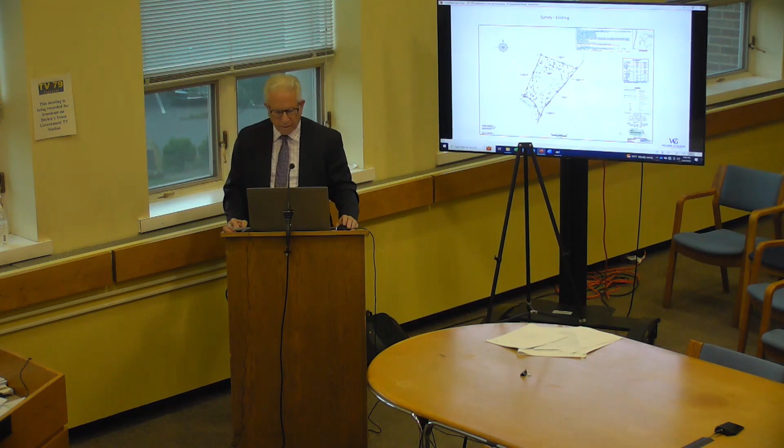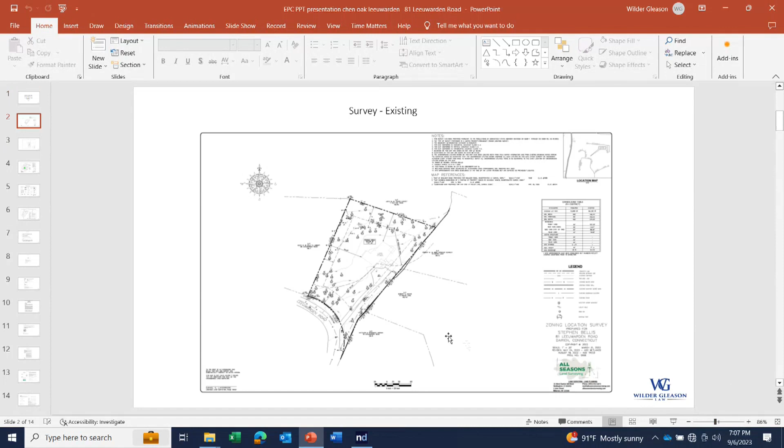For some reason I'm not able to do that at this point, given the present setup. Let me go back and see if I can do this a different way. Okay, this one I can blow up.

So this is the survey that you have, and it shows, where my pointer is, the old one-story dwelling, a 2,200 square foot building. We're on 1.27 acres, a little over 1.25 acres, and the wetlands are all in the north along here where my cursor is. That will show up on the architect's survey, or the site plan that we'll provide you shortly. The existing house was well within the 50-foot wetland upland regulated area, and it didn't have any backyard. It's located 157 feet from the street.

Now that has been removed, and if you've been out there, you can see the site is vacant in anticipation of hopefully a speedy approval from you all so we can move forward. There are no structures to treat stormwater. There's no buffer on the wetlands. Untreated, unrenovated water runs directly into the wetlands.

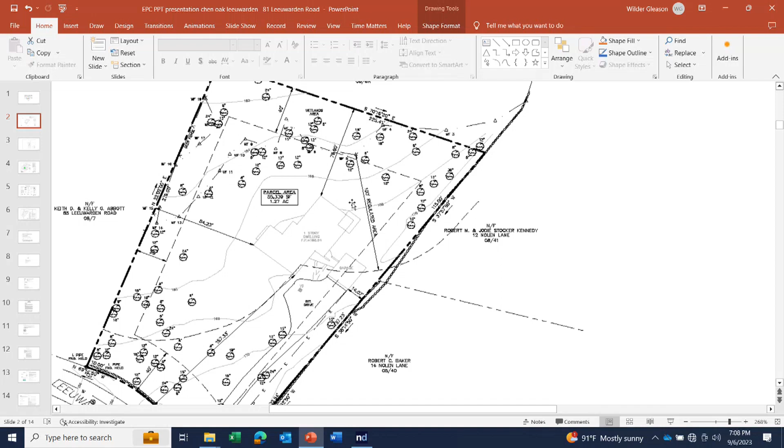Let me add also that there's no underground recharge of water, and no marking of the wetlands and sensitive areas. All of this will be addressed in the plans that we submit tonight. So we're making significant improvements over the existing conditions.

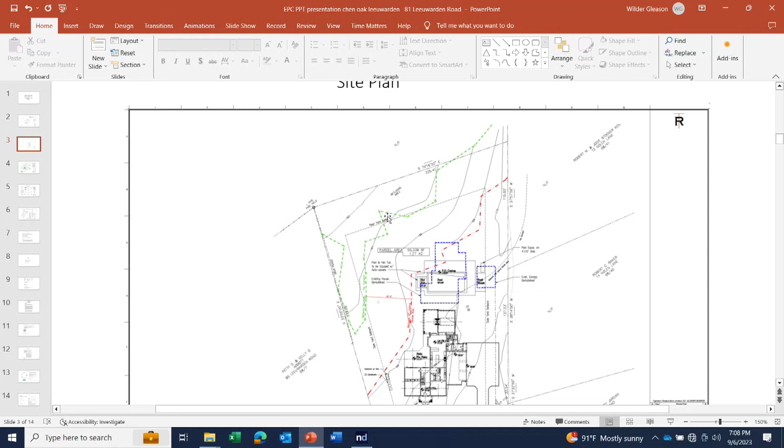Let me go to the next slide. This is the architectural site plan that was submitted this afternoon, the third page in your outline. The green line is the wetlands, and you'll see they're confined essentially to the northwest corner of the property. The red line is the 50-foot regulated area, and you can see the old house encroached substantially into it.

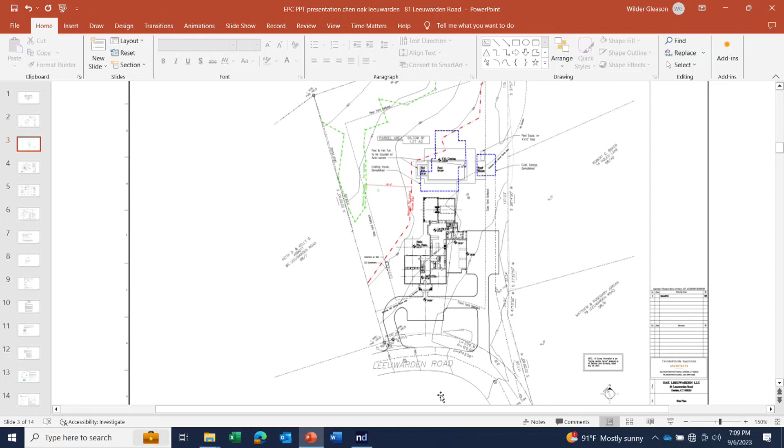Our new house doesn't touch the upland review area at all. Only a small portion of the pool apron or patio goes into the upland review area. The house has been moved so it's 55 feet from the street, 100 feet forward of the old house. The old house is shown in blue, and you can see its location proximate to the wetlands, and how much further away we are now.

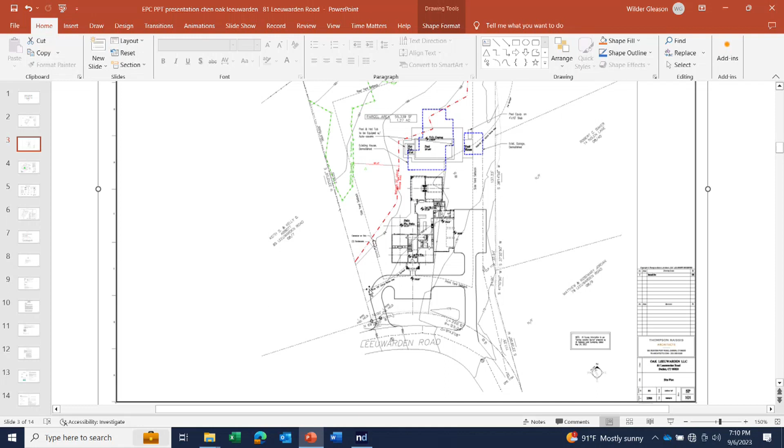That allows stormwater runoff from the roof to be renovated over a greater distance before it gets into the wetlands. That reduces temperatures and particulate matter, and as you'll see in the next site plan—this is our engineer's plan, which has been submitted.

The green area of the roof you see here is going to be directed into the Cultec. They've got 28 Cultec located substantially, virtually all of them, in the upland review area. Those allow us to meet the town's regulations for stormwater drainage. We'll have a zero increase in runoff in a 2-year, 5-year, 10-year, 25-year, and 50-year storm event—we're actually reducing stormwater runoff because it can recharge in these Cultec.

There are also 2 additional Cultec proposed near the pool, for sump pumps if needed for the basement. The water from the sump pump would go into these Cultec and then overflow into a level spreader.

Matt Popp, our environmentalist, looked at the level spreader and said it should be moved and placed so it's on the contour, consistent with the contour. Right now it's on a slight downhill, and water would tend to go down to the bottom end of it. We want it perpendicular to the fall line, so the water will migrate and sheet flow into the wetlands.

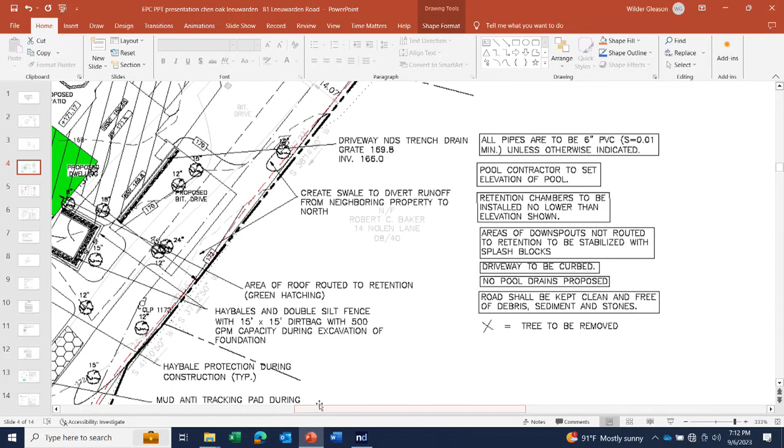There was a question about our first floor elevation. For the record, the house is served by town water and town sewer, and those lines are marked in the front—this is the water line right here. I'll blow it up so you can see. There's the water line leading to the house, and this is the line to the sewer. So we're not affecting any trees, and the lines are designed to serve the property without impacting water or sewer.

The first floor of the house is at elevation 171.5. Rick had conveyed that you wanted that information, and you also wanted the basement elevation, which is 159.45. So we're about 12 feet below the first floor, which is a couple of feet above the grade.

The existing grade is 170 on the east or southeast side of the property, and 174 on the northwest side of the house. So there's about a 4-foot drop as you go from one side of the house to the other.

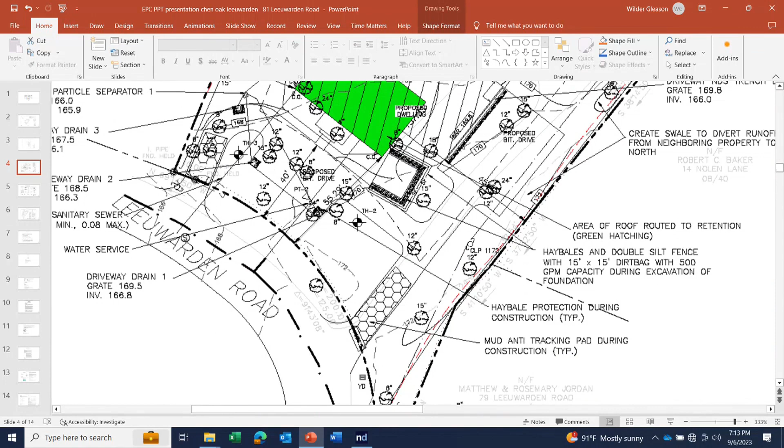Our grades are such that we're at elevation 172 in this corner of the property in the front, and it drops gradually to 162 in the rear—about a 10-foot drop over 300 feet. So it's gently sloping, not precipitous in any way, and those who walk it can see that it basically sheds water, flowing towards the northwest where the wetlands are located. And that's as it should be.

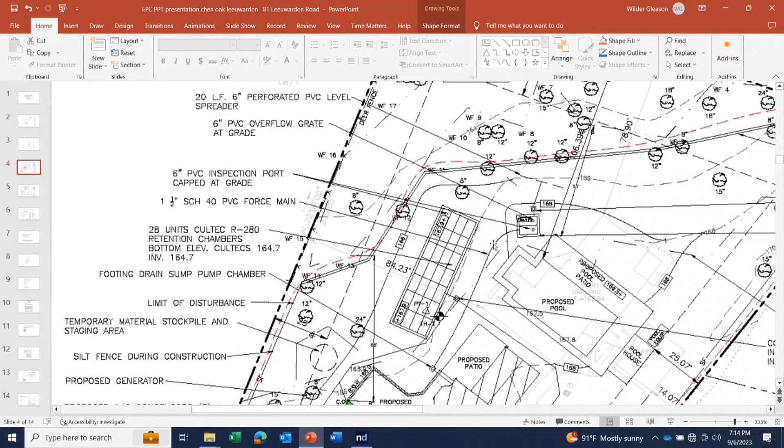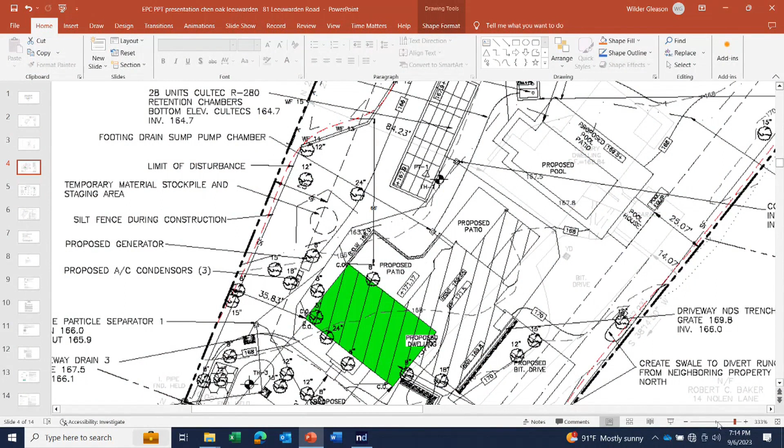Our site design has taken advantage of that, which is why the level spreader for the sump pumps is where it is, if we need it. We're proposing a new pool and patio in the back, and we've got a much more gracious backyard by moving the house closer to the front. I'll scale this back so you can see a little more, and bring it up a bit—so we've moved the house forward.

Wayne, our engineer's report indicates... the Cultecs here allow for retention of the water, reducing thermal modulation, so that hot water from the hot roof will be reduced in temperature by the time it gets into the wetlands. It will also recharge groundwater, which are environmental values you support. So we're designing it to recognize and implement those objectives.

There are a series of hay bales here if we need it for dewatering the foundation. We do have soil and erosion controls around the perimeter. There's a single row of silt fence here, and near the wetlands it becomes a double row, until we reach the southeastern side, where it's a single row of silt fence. That's all the protection we think we'll need, because there's very little construction activity close to the wetlands.

I'm going to turn to the landscape plan. These are details which, if you have questions, we're happy to address, and I'll ask Wayne to address those. The planting plan was submitted, prepared by Matt Papa, and Matt's here to discuss what he's proposed in terms of the improvements to the site.

Good evening, Matthew Papa, landscape architect and professional wetlands scientist from Environmental Land Solutions. I prepared the landscaping plan, which you see up on the screen.

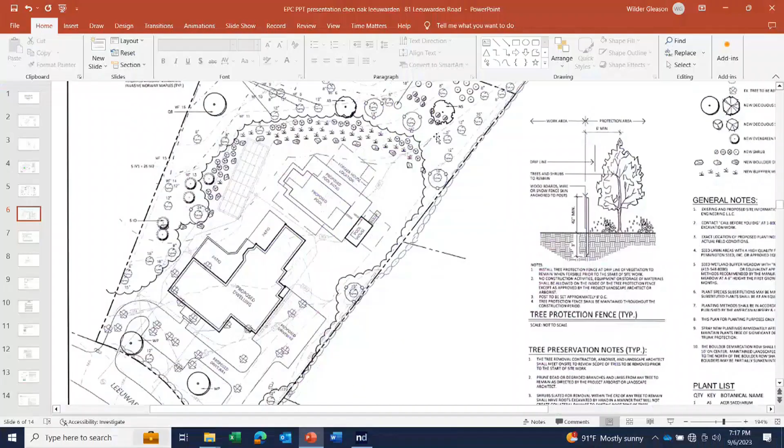There's a water course just off the site that runs parallel to the rear property line, coming from here across to this point. The site in the back is wooded, where the wetland is. This area of the wetland has a fairly good tree canopy, but there's a thin ground cover or understory layer of shrubs, so on the plan, most of this area is planted with shrubs.

If you go to the northwest portion of the site, it's fairly open, so that's where there are more trees proposed, actually 4 shade trees there, and a shade tree over here. That's why the trees are placed there.

Just almost in the wetland area, maybe just outside, there's a small debris pile which we're proposing to be removed. As we move toward the front of the site, where the underground detention galleries are, just down the slope of that, we have shrub plantings that will aid in treatment if there's any runoff from those areas.

Between this house and the house next door, we have some evergreen native trees, mainly American holly.

In the streetscape, there's one large tree, probably the specimen tree on the site, the most significant tree just off the property line, and probably the most valuable tree on the property. So we do have tree protection around that, and in the rear of the site we also have tree protection around some of the sugar maples here and here.

The trees right through here, I didn't propose any tree protection around those. Those are Norway maples, a non-native invasive species, so if we want tree protection around them we could install it, but usually I don't try to save those. Since they're close to the wetland, I just proposed them to remain as is, but with no tree protection.

I did review where the sump pump is discharged. It's into an underground detention or retention gallery right here. In my letter, I did have a mistake, actually.

I was proposing that where those galleries discharge, near the level spreader, they get moved over here because it's further from the wetlands, but it's actually about the same distance from the wetland. However, there's a longer surface flow from the area I'm proposing, across the wetland, to this corner of the site.

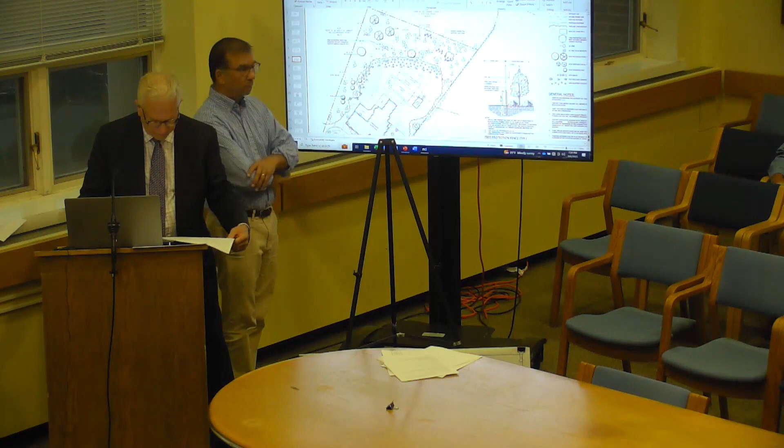Okay, so maybe you want to take the podium if you're going to answer the question. So I'm looking at this blue line here of the pool, and I'm looking at the upland review area. And this, I could be getting old, this does not look like that. Am I wrong?

The northern outline of the pool, crossing over the upland review area to the north, where the blue lines intersect the red line, does not look like the plan that Matt is speaking to.

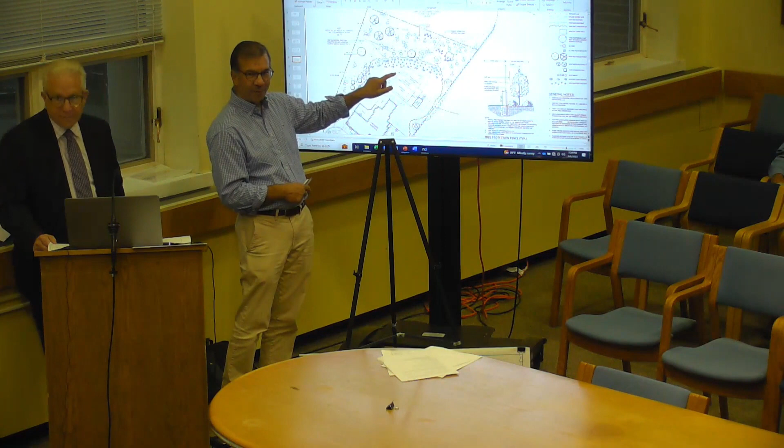When you do the offset from a point, like if you just offset on a computer 50 feet, a lot of times surveyors, the line is jagged over here. But actually, 50 feet from here, you have to have a radius, which is right through here. So it comes right to 50 feet. So if you measure the distance on this plan, it's greater than 50 feet.

I'm sorry. Am I the only person seeing this? No, I had the same question. Regardless of scale or distance, the shapes don't match, right?

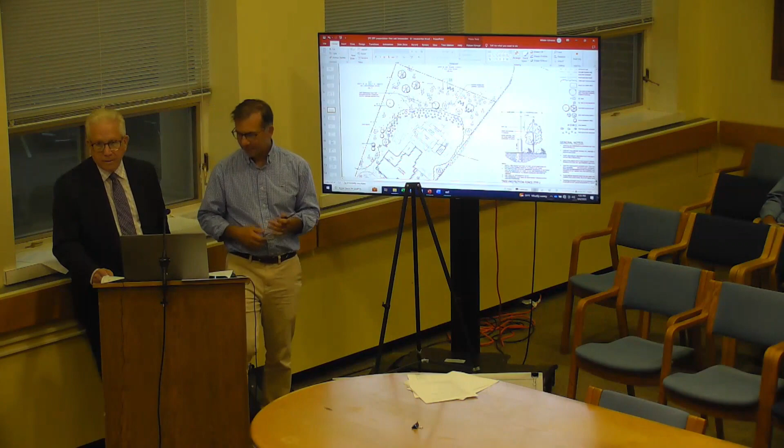If we go back, Wilder, to this plan that you submitted, there's a green and a red line. And they're not running parallel to each other, inclusive of that, because you got 50 jagged feet there that relates to the terrace area.

Let me take a step further. In this plan, it looks like the pool is materially more out of the upland review area. And this drawing looks like the pool is more in the upland review area. So which one are we supposed to be looking at?

I would trust this one and the engineer's plan. So why did you pass this one out? Because we got it this afternoon, we asked the architect to do this to show the difference, and after we submitted it, we realized there's a difference, and they're inconsistent. So if you noticed there was a difference, why'd you pass this out to us? Because I'd already put it in the other one, and this was just presentation. This is garbage. Okay.

So the upland review area, just a second please. Rick, for the record then, this handout is to be ignored. Correct. Okay, and it should be noted as part of the file, to be ignored, so that we don't have an inconsistent record. I want to rely on what Wayne, our engineer, and Matt have supplied. Okay.

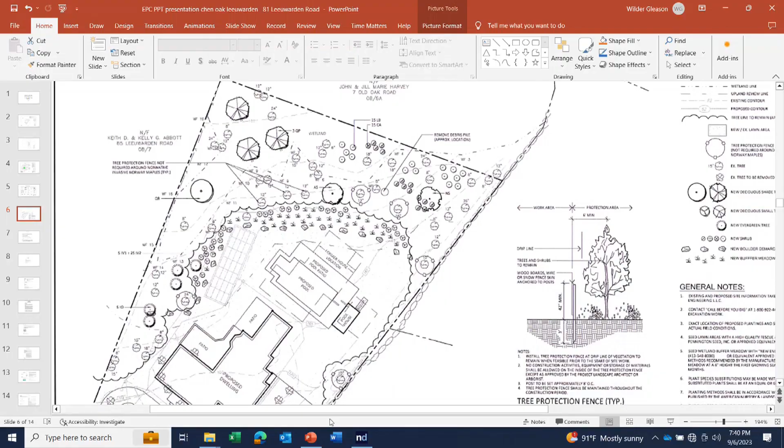So we're sort of trusting a guy who's done business and built houses for 40 years in town that he'll do the right thing here. I think you can rely on Sean's word here.

Michael, you want to say something? Yeah, two quick questions. Bill, was your sensitivity to prior applications where, let's say, there's a substantial water course just off the property line that the surveyor did not include or mark as a regulated area? Yeah, we had to put them in.

Right, so for example, on this application, I haven't visited the site. If there appeared to be an intermittent water course, would that potentially be an additional encroachment of the regulated area, or just nice to know? It's not a first-class wetlands we're starting with, and it is an intermittent water course, but when they're putting in an application and you see it's so close to or on the property line, you can't ignore it. It's something we need to look at the first time and make sure we're familiar with that site.

Right, and when I don't see it here, and then if you don't go out there, then it's like, what's that? So I think we've been asking people to put anything, ponds, everything else, very close to the line on their applications because it affects those water bodies.

And then the second question, maybe for Wayne, is there a capacity to daylight the footing drain? Or does everything have to be run by a sump pump?

Yeah, no, I mean, you would need a sump pump, given the depth of the basement, so you're gonna be pumping up. Are the sump pumps inside the foundation or outside? Do you have a main sump pit outside? I intend it to be outside.

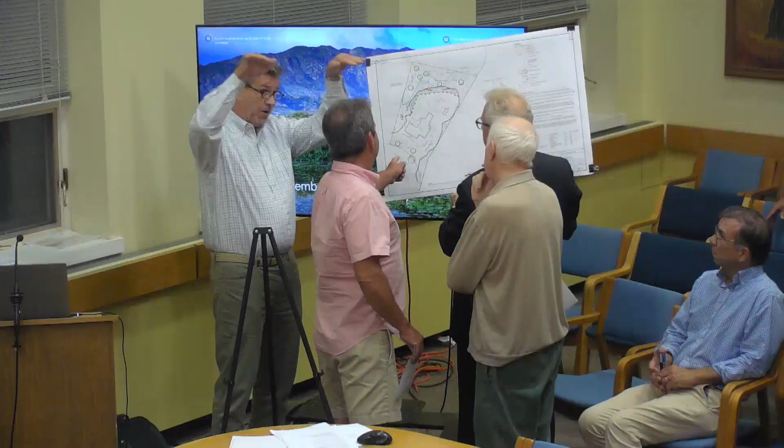No, all the water will go that way no matter what. But are you gonna be cutting land here to make this driveway? If that driveway actually goes in, which it's gonna be—I'm trying to talk her out of it, she's pretty much amenable to that. I just want to know the height of it. I mean, I stand out there. I know where my mailbox is, and I know where you're proposing the house is gonna be. This was the architect's drawing, and we're trying to get rid of that anyway.

Just use one driveway to save some money and have it look nicer. I'm sure Jasenia would make a commitment just to get rid of this, because we've already talked about it, just to cut the cost in half. I don't want to go over there, it's crazy. She doesn't either, but the architect made it look a little bit more elaborate than yours. Jasenia, do you want to just make a commitment now to knock that part off? So you'd ultimately just be in the original plan, addressing the concerns, and then come back with a plan that addresses all your concerns. Because that's a steep elevation from where you were proposing, or from that architect's design. Yeah, so that is possible.

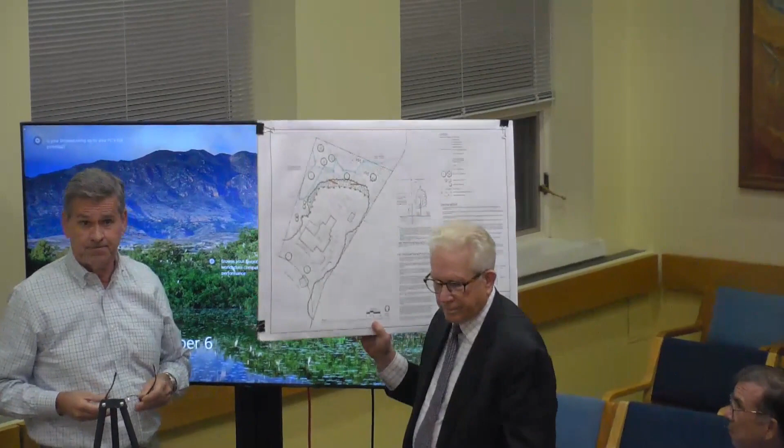Mr. Abbott, you obviously got their attention. As far as this commission is concerned, it's not within our area of regulation. This commission can't—I mean, you could talk to the applicant about that. For this specific commission, it's not within our wetland regulation area. Okay, so now that you've got their attention, you can have a conversation with them. And it seems clear your concern is going to be addressed by changes to the driveway.

I just want to make sure that, look, we lived through Superstorm Sandy. All those houses all around there—I don't know about Bill's house, but all the houses behind Bill and down on Old Oak, they were full of water, everybody was full of water. We didn't have a drop of water in my house. I never had a drop, I've been there since '09. I just don't want anything changing that's somehow gonna all of a sudden bring water onto my property. I've been through the worst and I don't have a drop. I'm like one of the only ones in town, so I want to make sure it's gonna stay that way.

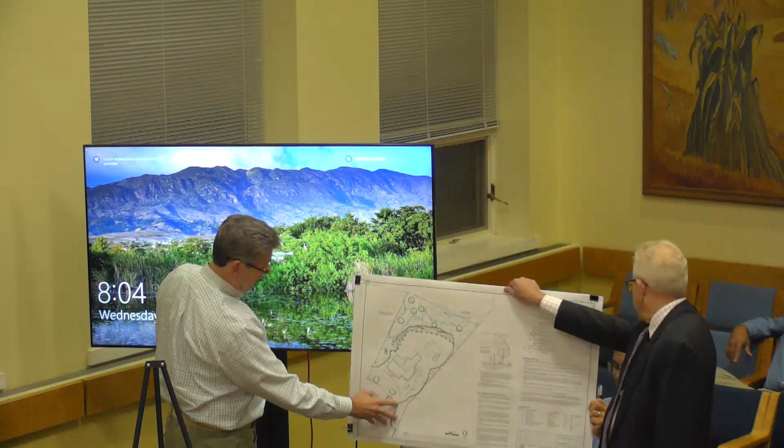I think we're the low point with the wetlands here, between where we are and where your house is. So I don't think that's gonna happen, but that's— But I know there's a flow, because there's a drain ditch by the driveway too, and there's water flowing under there all the time, you can hear it. So I just want to make sure that no water's gonna get—that this part of the property, up at the southwest corner, gets constructed in such a way that...

We've got your point, and they've taken note of it. Perhaps amend—I'm sorry, thank you. This is a public hearing, and we encourage discussion, we're happy to hear it. We're glad to work with you on this. I think Jasenia sent your letter, happy with it. That's good. I don't want to work with you and all that—I just want to make sure I'm not gonna entertain... All right, thank you, Mr. Abbott. Is there anybody else from the public that would like to speak?

Going once, anybody else? No, okay, thank you, members of the public.

Where do we go from here? Maybe have Wilder summarize how he sees a vision to us to getting to an approval. So, we have stipulated first that we will raise the basement 2 feet from the 159 elevation to 161, I think it's 0.45.

We have stipulated that if the site conditions indicate it's appropriate to not put a basement under the family room or the kitchen and garage, that's what will happen. It'll be a crawl space. We do want the basement under the front portion of the house.

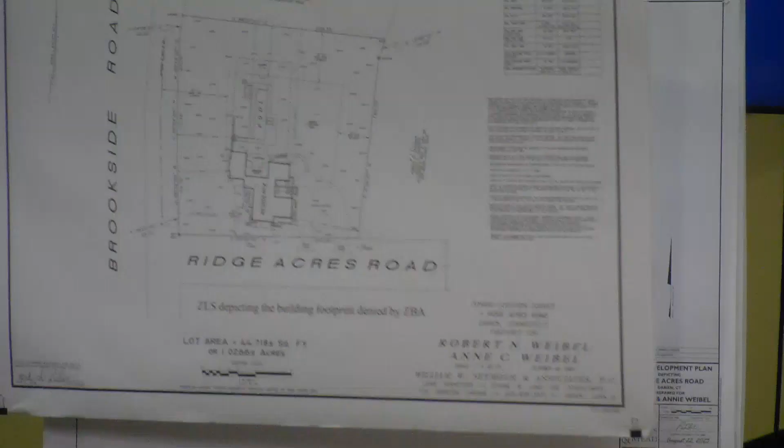The wetlands are in the eastern portion of the property, ranging from manicured surface to light to moderate woods, in association perhaps with a small water course in that area that drains in the southerly direction. The property's not in the flood zone, and there's quite a bit of history associated with the project and the applicants before the various boards and commissions in order to get to this point before the commission. So I'm available to answer questions. We'll let the applicant move forward.

Good evening. My name is Patrick Scher. I'm a project engineer with Redniss and Mead and an engineer licensed in the state of Connecticut. Joining us tonight, we also have the property owners, Robert and Annie Weibel, and the project architect, Daniel Conlon.

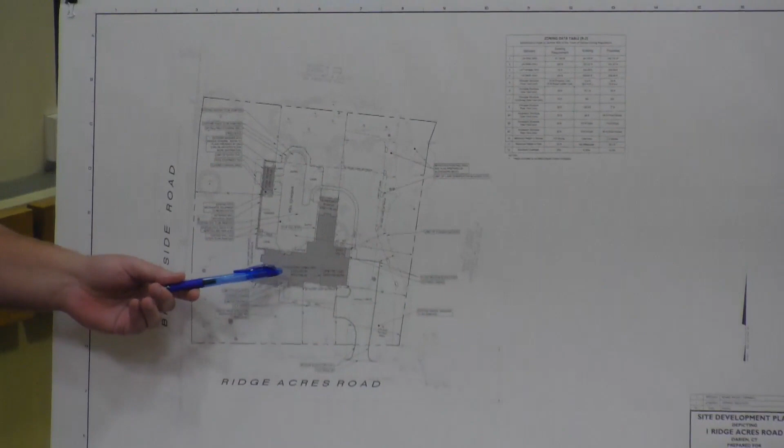Our client is proposing to replace their 4-bedroom home. In 2021, it was destroyed in a house fire and then was recently demolished this spring. The new building footprint had to meet zoning setbacks and was pushed farther off the front yard. You have the structure with the garage. The existing pool is to remain, and a new pool house is proposed. The proposed driveway enters to the east of the house.

Proposed drainage mitigation is provided via 2 Cultec systems and a crushed stone reservoir underneath the driveway. A waiver was originally requested to use existing conditions, but it was denied, so we did go back and redesign with meadow conditions. So everything has been revised to attenuate peak flows through the 50-year storm with meadow conditions.

As part of our response to the comments, we did take a look at groundwater and its effect on the basement. Seepage was observed in the bottom of one test pit, and it's pretty clear that these sump pumps will run intermittently. That was also agreed upon by Joe Connis, the peer reviewer, and he noted that in his comments we received today.

Question: your perk test in relation to the perk test that indicates the water level in relation to the basement level. Yes, so we performed 5 test pits. Only one, test pit number 4, had visible groundwater of about 44 inches below grade. That lined up with elevation 167, and our basement elevation is at 166. So we don't anticipate much groundwater being an issue, so the pumps may run in wetter times, but intermittently.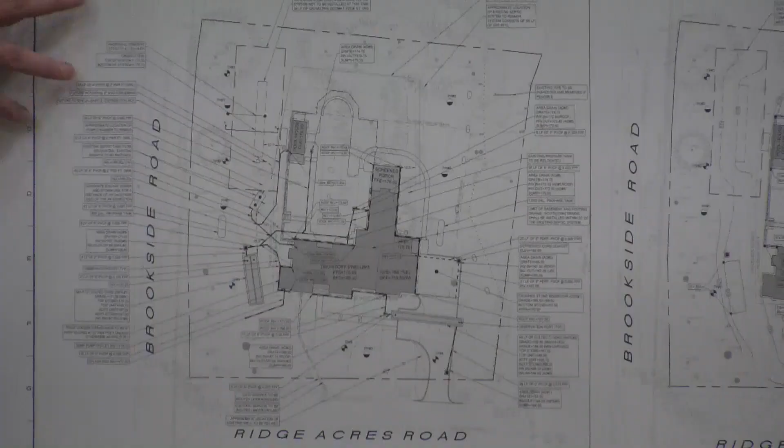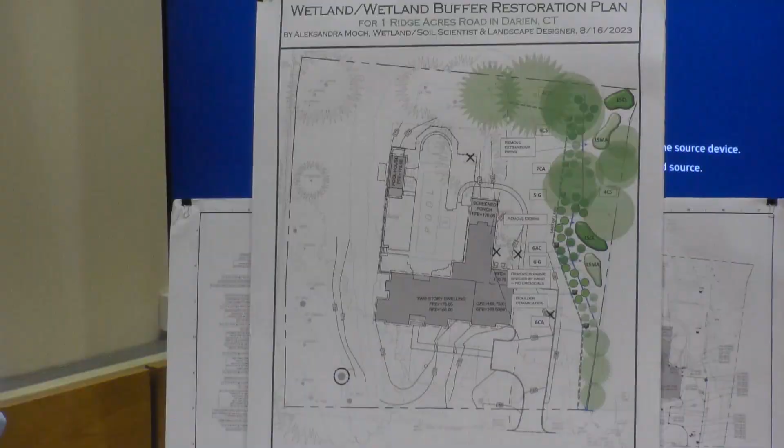The planting plan was also revised per the comments to establish a more defined buffer. The number of shrubs were doubled from 21 to 42, used between the boulder demarcation to help create a more defined limit of lawn and provide a greater buffer between the lawn area and the wetlands. New native grasses and ferns are proposed, and invasive species are to be removed along with any debris. This represents an improvement over existing conditions, improving the buffer and the wetlands themselves. Not to mention, under existing conditions none of the stormwater was receiving treatment, and now we're treating nearly all impervious surfaces while reducing peak flows. So it does represent an improvement to the wetlands and to the site itself.

We did receive comments today from Joe Connis with Tighe & Bond. Two were related to the warrant response. The first was regarding the well setback. If it had a yield rate above 10 GPM, we would need a 50-foot setback to the infiltration system. Per the state health code, we're below that at around 1 as an average, so the setbacks are not an issue. He also commented on the stone we're modeling below the infiltration system - we just weren't showing it on purpose, and it was actually a conservative design note. The third note commented on our interpretation of the groundwater, and he agreed with our assessment that it won't be an issue with the basement itself. We can prepare a response to be submitted, but I wanted to get it on the record today that we don't anticipate those comments having any impact on the plans themselves.

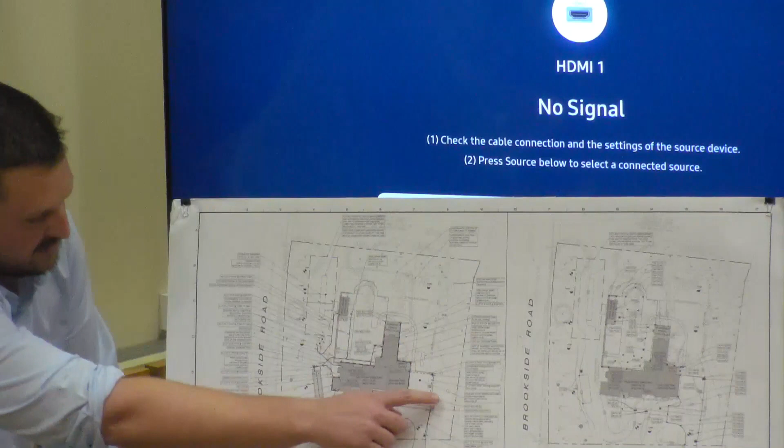On the planting plan, is that the area that leads into the garage? Yes, it's kind of this flatter portion right here. How big is that, about 20 by 20 or 30 by 30? It's 700 square feet. And how much crushed stone do you have underneath? We're at 167, and then grade above it ranges from 168.5 to 169.5, so at a minimum we have a foot of crushed stone, and more when the grade starts to slope up.

That sounds very interesting, as a design it sounds really interesting, and the plan looks great. I have no questions. Okay, I don't have any questions either. Carolyn, would you - I'd come back to you because you said you might have something else.